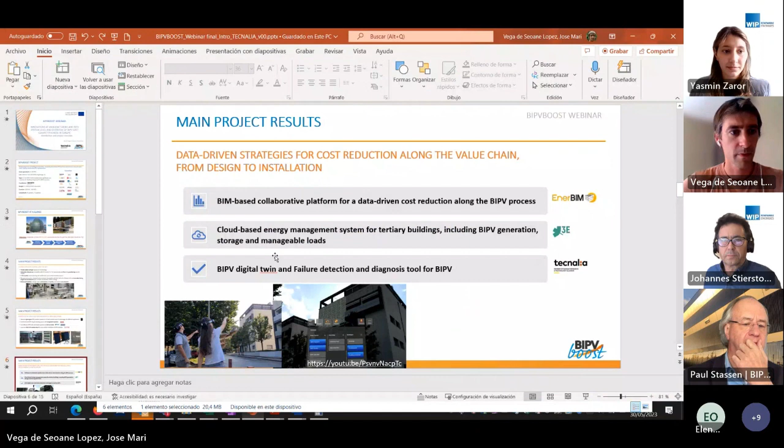As I said, this is the last webinar we are covering in the project, dealing with innovation at manufacturing BIPV system level and overall BIPV cost competitiveness in Europe.

BIPVBOOST stands for bringing down costs of multifunctional building integrated photovoltaic solutions and processes along the value chain, enabling widespread near zero energy building implementation. This was a proposal submitted under the topic demonstrating significant cost reduction for BIPV solutions in 2018.

Luckily we were successful in this competition and had the opportunity to implement all the activities that we proposed at that time. It is a consortium project led by Tecnalia, composed of 19 partners from 7 countries, covering different parts of the BIPV value chain.

In a nutshell, the project aims to move on from iconic BIPV to the mass implementation of the technology. We are aiming to progress towards the full adoption of BIPV technology in the construction sector.

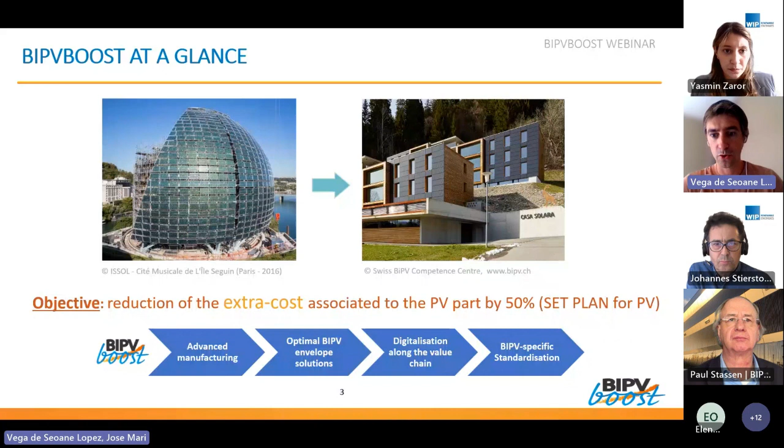Starting with advanced manufacturing, also covering the optimization of the development of certain BIPV products, implementing a digitalization strategy along the value chain, and also tackling standardization activities in the BIPV sector.

I will cover now a few of the highlights of the results we achieved in the project. This will be further detailed by Xavier Otaño from Mondragon Assembly, but very briefly, we have developed a flexible tabber-stringer based on crystalline silicon technology.

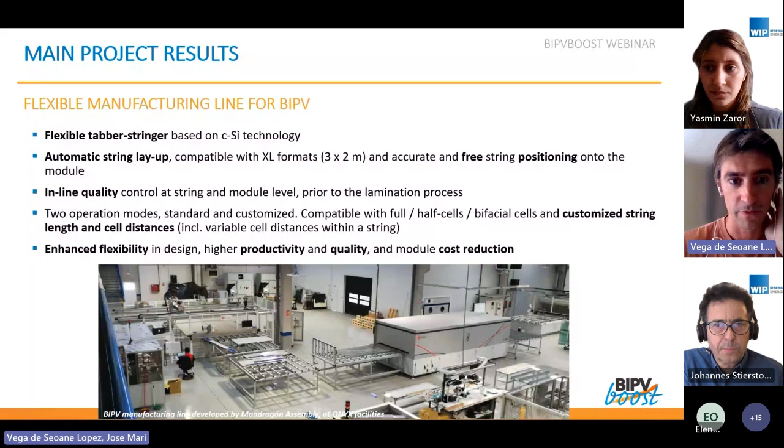We have achieved a high degree of flexibility in the positioning of the strings, also in the manufacturing of flexible strings, both in length and covering different cell distances, including variable cell distances within the same string. We have also implemented inline quality control strategies prior to lamination processes, improving the productivity and quality of overall production. This will be further detailed by Mondragon today.

Also in the frame of this webinar, we have a set of products that were developed and optimized in the project by Onyx Solar, PIZ, Flisom, Schweizer, and Tulipps. I won't enter into the details, since this will be part of today's speeches from our colleagues.

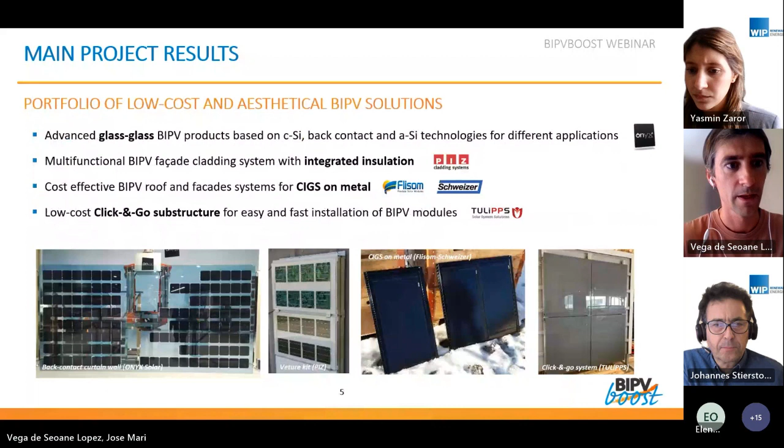On the digitalization framework, we had a previous webinar covering this topic already, which is also available online on WIP's YouTube channel, and you can go and check. We have essentially tackled the development of, or the progress in, the EnerBIM BIM Solar tool, which is a collaborative platform for data-driven cost reduction in the BIPV process.

We have also tackled a cloud-based energy management system for tertiary buildings, including BIPV generation, storage, and manageable loads from 3E. Tecnalia has led the activity in the development of the BIPV digital twin and the failure detection and diagnosis tool for BIPV.

On the standardization framework, also part of the webinar series we have created in the project, there was an intense discussion on how BIPV should be qualified and tested in the sector, and we came up with 4 different testing procedures that could provide a better approach to the current situation in the qualification of BIPV solutions.

Today we have a fragmented standardization framework, and we have proposed a new combined approach that should better allow the testing of these multifunctional solutions. We have worked on energy efficiency, energy performance in non-conventional scenarios, mechanical performance of BIPV elements, and also fire reaction.

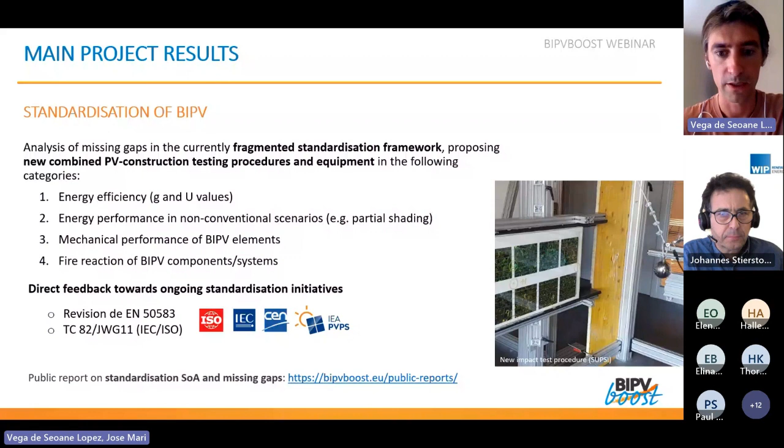Luckily, we are in direct contact with ongoing standardization activities, and some of the testing procedures that we have developed in the project are now being discussed in these forums, which is good news. And we have some available material in the public repository of the website.

And then a brief overview on the demo realization in the frame of the project. We have the first demo site in Puertollano in Spain, which hosts bifacial balustrades manufactured by Onyx Solar, and also a walkable floor using back contact technology, also manufactured by Onyx Solar.

We have then the use case of this new manufacturing line developed by Mondragon Assembly and demonstrated at Onyx, which enabled the manufacturing of these customized components, including also the combination of the glass solution from Onyx and the fast installation solution from Tulipps, the click and go system that Tulipps will explain today. This is another view of this demo site.

Then we have demo site 3 in Mons, Belgium, which includes the collaboration between Flisom and Schweizer in this CIGS on metal roofing shingle, which was demonstrated in a multifamily house in Mons. And at last, we have the realization from PIZ, also in collaboration with Onyx Solar, with a Veture kit developed in the frame of the project, which was demonstrated in a residential building in Italy.

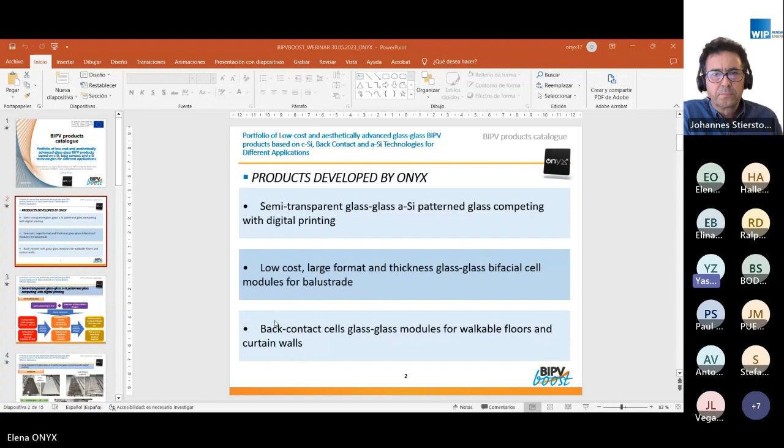Elena, sorry, can you make it full screen? Full screen? No, at least I cannot see it full screen. Now? No, it's not on presentation mode. Maybe you shared the wrong screen. Just a second. And now? No. If not, I will try to share mine because I have your presentation. You can try to push F5. I don't know what's the problem. Elena, if you want, I can present. Don't worry. So here is in presentation mode. You can see my screen, right? Yes. Perfect.

Okay, so I will start again. Here I'm going to present the different products that we have developed within the project. We have based our work on the development of 3 different approaches. The first product was based on semi-transparent amorphous silicon pattern glass, competing with digital printing. The second product was based on low-cost, large format and thickness glass using bifacial cells for balustrade applications. And the third product was based on back contact solar cell glass modules for 2 different architectural applications: one for walkable floors and the second one for curtain walls.

So next slide, please. Let's start with the first product, the semi-transparent amorphous silicon pattern glass, competing with digital printing. To develop this first product, we follow the methodology that you can see on the screen. We use the laser used in the manufacturing of BIPV modules based on amorphous silicon. This laser is used to give the different transparency degrees to the PV modules.

With this also we performed 4 different pattern designs based on this technology, and we followed a step-by-step process. The first step was to develop small prototypes of these 4 selected patterns, and these 4 prototypes were tested by visual inspection. We also measured the electrical response, and the samples were subjected to damp heat testing. The prototypes that successfully passed the test were then validated, and they passed to the next step

of the development. The second step was to manufacture full-size prototypes with dimensions of 1,245 millimeters by 635 millimeters, and these prototypes were also tested by visual inspection and the measurements of the electrical response. And once they successfully passed the test, they were validated and passed to the next step of the methodology. This last step consisted of the development of XL size prototypes with dimensions of 2,000 millimeters by 635 millimeters, and we followed the same methodology. The prototypes were also tested, and the good ones were validated as a final product.

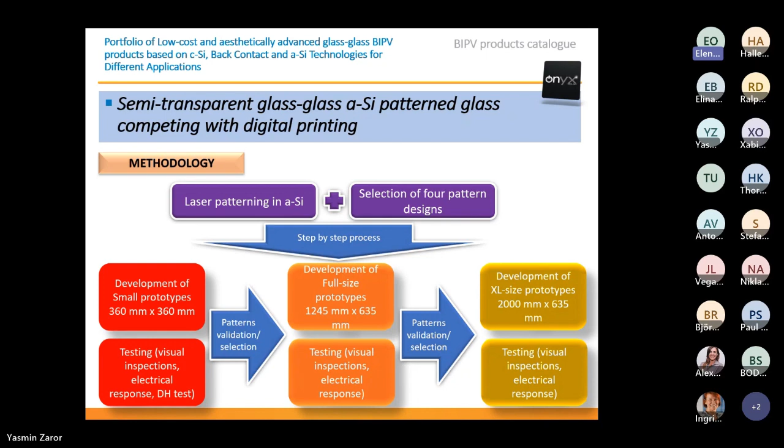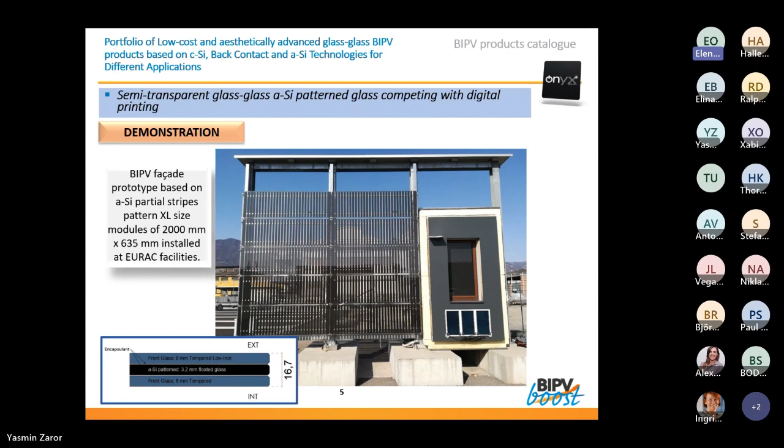Then one of the patterns, in this case the amorphous silicon partial stripe pattern, was selected to be demonstrated. So in this case, we manufactured 10 XL size modules that were installed as a BIPV facade solution at EURAC facilities, and this demonstrator is being monitored nowadays.

So next slide, please. So let's see now the second product that we have developed within the project. In this case, it was based on bifacial cell modules, and the idea is to develop a product for integration in balustrade applications. So the methodology that we followed was based first on the selection of the bifacial PV cells, and then the idea was to manufacture different glass BIPV modules by following a progressive increase in the dimensions and in the thickness of the different samples. The process followed was also step-by-step, and the methodology was very similar to the one that we followed for the first product.

First, we developed small prototypes, in this case with 2 different thicknesses, and the samples were tested by visual inspection. We measured the electrical response, and the samples were subjected to damp heat test. Once the prototypes passed all the tests, the prototypes were validated, and also the process was optimized, and we passed to the second step. The second step was the manufacturing of full-size prototypes, in this case with a glass configuration of 8+8 millimeters. These prototypes were also tested, and once the results were successful, the prototypes were validated and passed to the last step of the development.

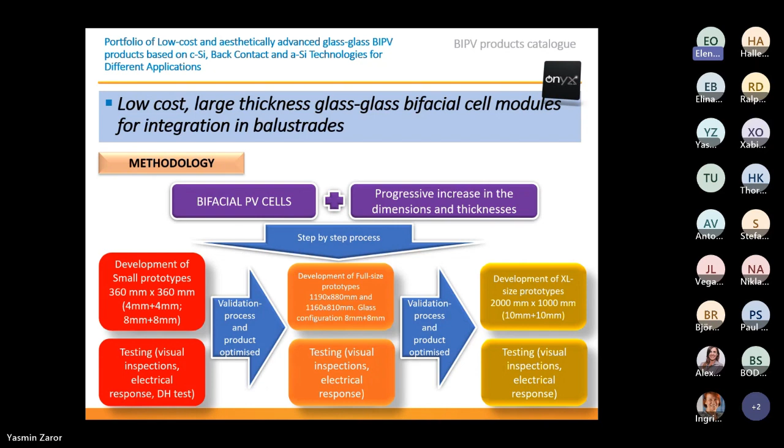This last step was based on developing XL size prototypes of 2×1 meters and with a thickness of 10+10 millimeters. These last prototypes were also tested, and once the results of the test were good, the prototypes were validated. So next slide, please. So here on the screen you can see the different prototypes with the different sizes that we manufactured during the process of obtaining the final XL prototype. Next one.

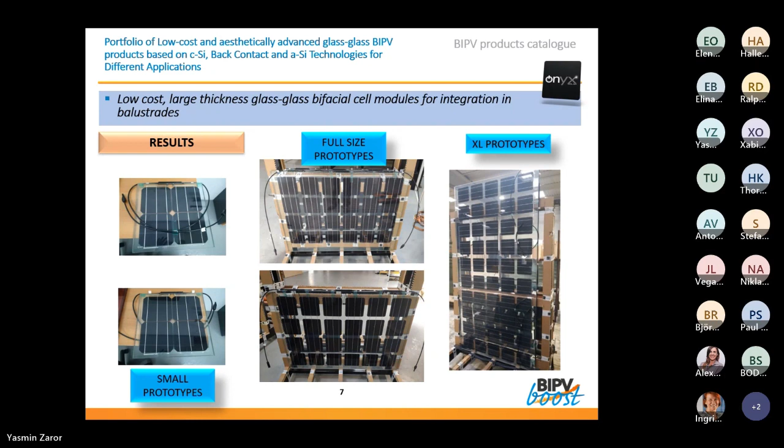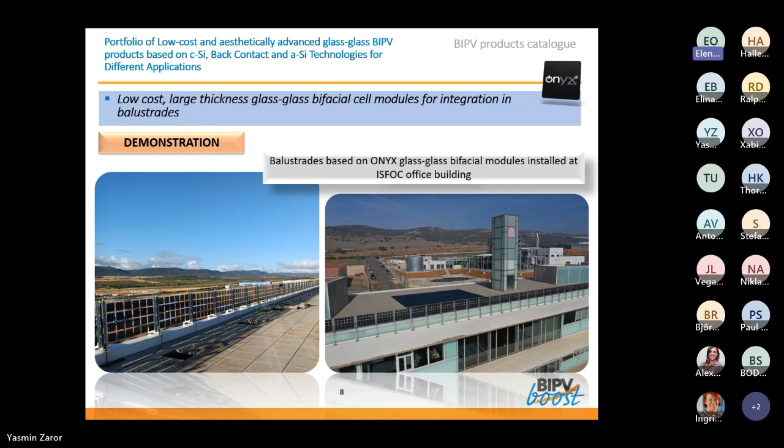So in this case, with this product, we chose the full-size prototypes to be demonstrated. The prototypes were manufactured and integrated as a balustrade application at an office building located in Puertollano in Spain. So next slide. Here you can see another picture of the balustrade and the implementation. The surface that was installed was around 126 square meters with an installed power of the final solution of around 13 kilowatts.

Next. So now here I'm going to show you the work performed for the third product. This third product was based on the use of back contact solar cells, and we developed BIPV glass modules for two different architectural applications, one for walkable floors and the second for curtain walls. The methodology used was based first on the selection of the back contact solar cells, and then we built two different workflows depending on the final architectural application.

In the case of the walkable floors application, the first step of the methodology that we used was to develop prototypes with dimensions of 600 by 600 millimeters and with a glass configuration of 8 plus 8 millimeters. These prototypes were tested by visual inspection. We performed the measurements of the electrical response. The samples were also subjected to damp heat test and also electroluminescence. Once the tests were successfully passed, the prototypes for walkable floors were validated.

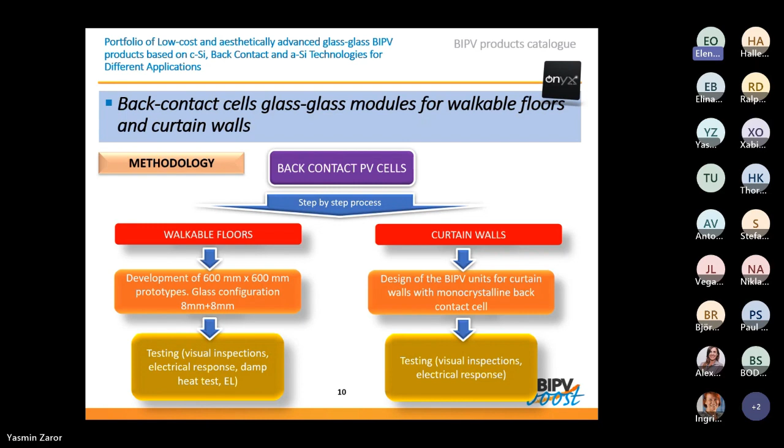In the case of the application of curtain walls, for the first step of the development of this product, we made several designs of BIPV units using monocrystalline back contact solar cells. Among the different designs, one of them was selected to be manufactured and tested. So finally, once the prototype was manufactured, it was subjected to different tests and then validated. Next slide, please.

So in the case of the prototypes of the products developed for curtain walls, as I said before, we made different designs, and the design that is shown on the right side was selected. In this case, we selected this design because we thought that it was the best example to study or compare the behavior of two different PV cell layouts in the same module. Next.

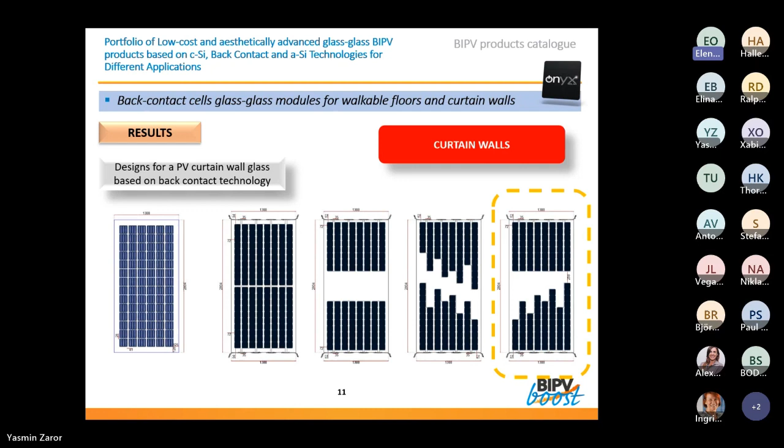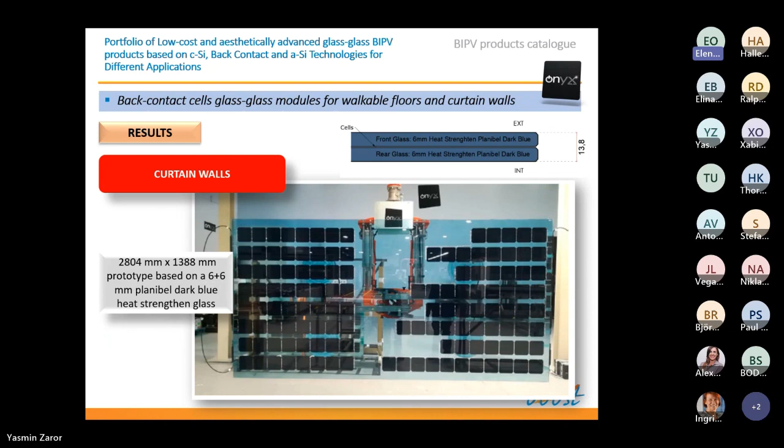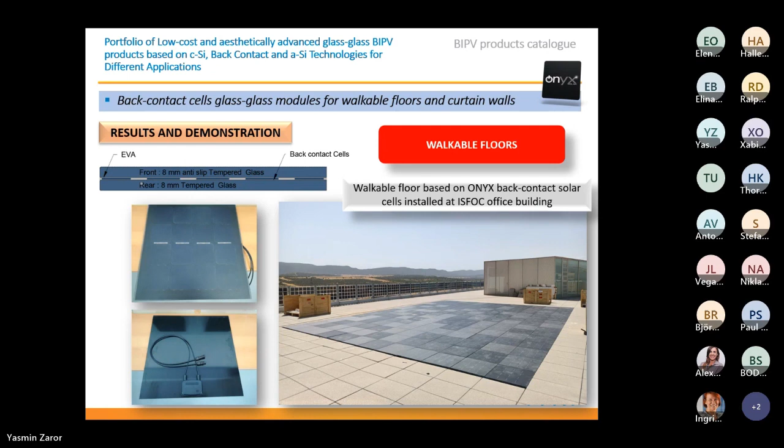And finally, the prototypes developed for the walkable floors application. On the left side, you can see the final prototype, the final module. In this case, this prototype has a front glass with an anti-slip treatment. And this product was also chosen for being implemented as a demonstrator. In this case, the walkable floor was installed also at the ISFOC office building in Puertollano in Spain. Next.

The surface of installation was around 69 square meters, with an installed power of 9 kilowatts. And that's all from my side.

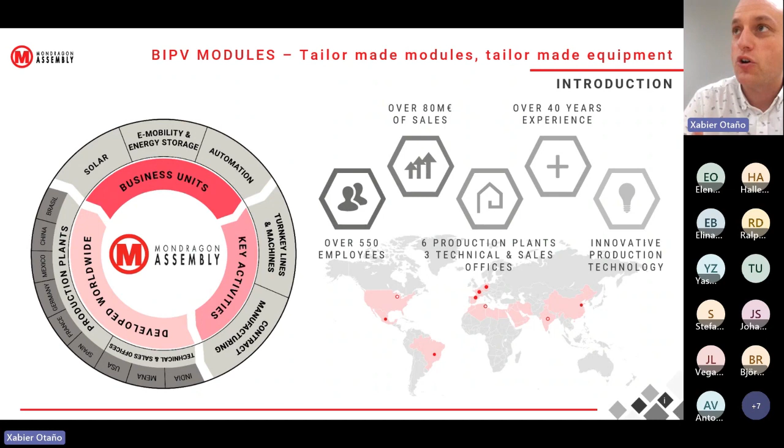Okay, so Mondragon Assembly, we are a company that builds equipment, with worldwide presence, and over 20 years doing solar manufacturing equipment. I'd like to focus in this presentation on the fact that there is a lot of PV industry in mainstream modules, but there are a lot of applications beyond mainstream modules, and specifically today, BIPV modules.

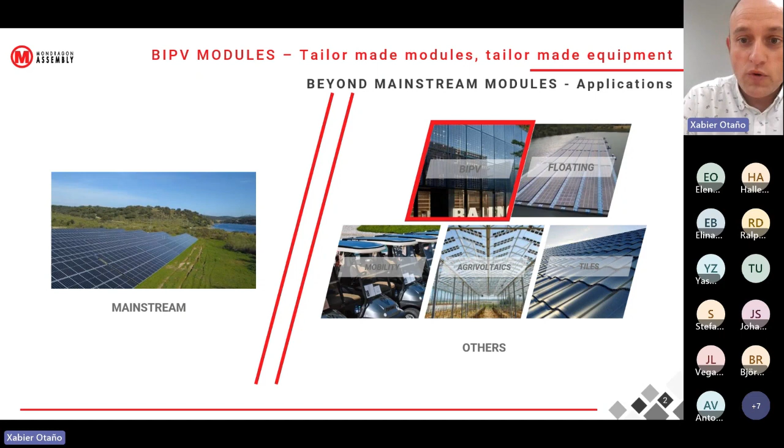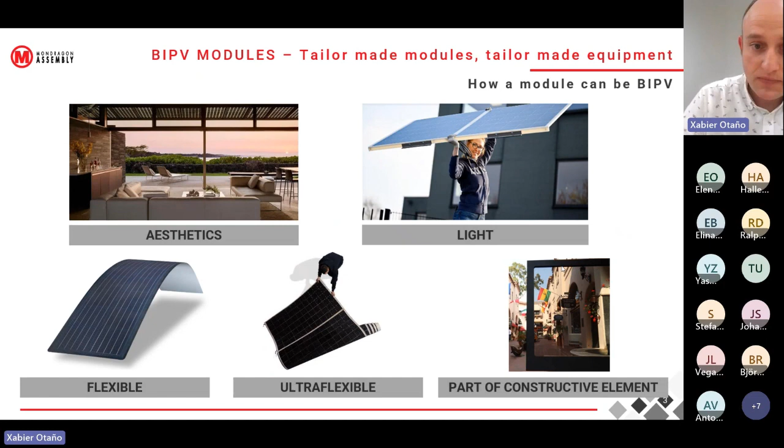So when we talk about BIPV, there are different ways that something can become BIPV. Some of our customers focus the BIPV aspect of their modules on aesthetics, as Onyx was explaining better than myself. Some others focus on how light the module is, and because it's light, it can do some specific things, being flexible, ultra flexible, or being part of a constructive element. That's also a little bit what Onyx is doing with making the glass photovoltaic, or some others are making windows that are photovoltaic, as you can see in this picture. So okay, that's for the modules.

What do we do in Mondragon Assembly so that our customers are able to manufacture these kinds of different, specific modules? When our customers are looking for aesthetics, we have developed our tabber stringer BIPV option inside the BIPVBoost project that allows us to have different gap distances between cells and different string configurations. So having a very flexible tabber stringer that allows a very aesthetic look of the manufactured module.

We have also developed a flexible tabber stringer. This is the MTS Flex, which is able to process back contact cells, Maxeon or Zebra, front and rear wired cells, welded, ECA, so very flexible for any kind of technology when searching for the look of a panel that has no wires.

And also, for very big and very small panels, when customers are looking for a very wide variety of sizes, we have developed a layup system, the system that puts the strings on the glass, for glasses from 0.3 by 0.3, extra small modules, to very large modules, 4 meters by 2 meters. That would be when we look for aesthetics.

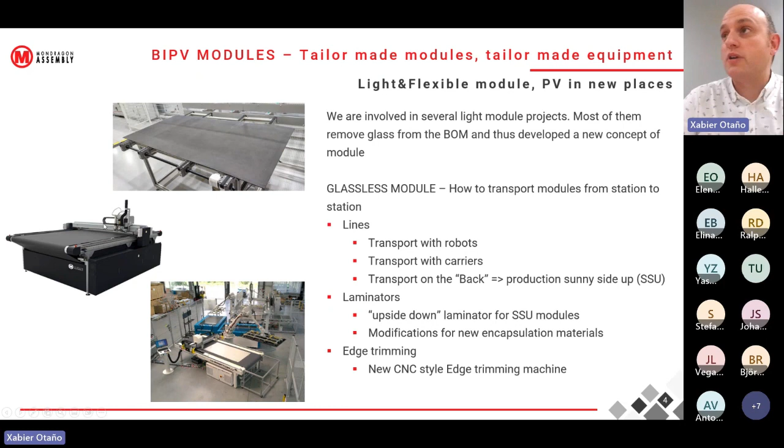And then another tricky thing when doing glassless modules is the edge trimming operation. For the edge trimming, normally in classic modules with glass, the knife goes against the glass, and the glass itself is used as the reference point to do all the trimming. When there is no glass, we need to use this kind of CNC style cutting trimming machines, and this allows us to do shapes that are not only square ones, but with rounded corners or other more fancy corners.

And apart from not having glass, we see that on BIPV, the applications are more and more integrated on the building, which means that the glass of a window or the wall or the facade itself will be a PV application. When it's part of the building, the challenge is where to have the cables, the junction box, or how to bolt or install them to the walls or the building, because it's not standardized and every product is customized. So we have developed specific machines for different applications for different customers.

So for example, when people are doing things without junction box, where to install the diodes. So we have done an auto bussing machine that includes the diode loading, or a specific, totally standalone station just for the diode soldering.

In classic, mainstream modules, the J-box is glued with silicone to the backsheet or the glass. But when we are not using glass, and instead of backsheet we are using other materials, the J-box with silicone needs special treatment on the material to be able to bond together. So we have developed machines, plasma machines, flame treatment machines, etc., to be able to do this bonding.

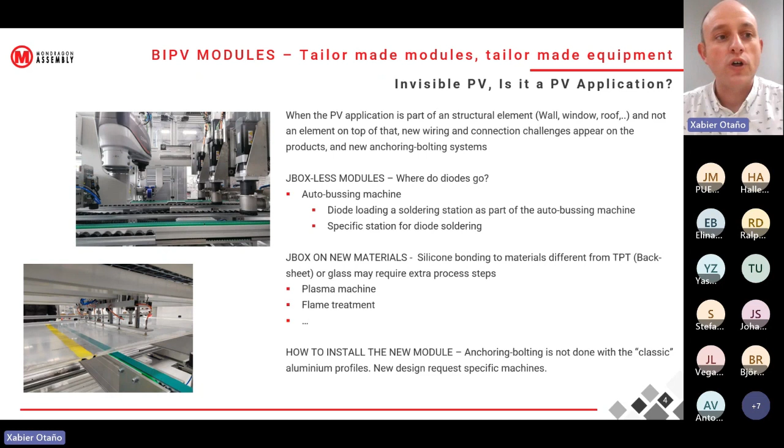And then, as mentioned, the installation of these new configurations on the buildings may require some special bolting systems that are not the classic aluminum profiles. So there are specific equipment and process steps that need to be developed for these applications, adding some studs, some plastic nuts, some other elements to do the joining. And we have also developed this kind of machines. And this is what we are doing in Mondragon Assembly in BIPV related applications.

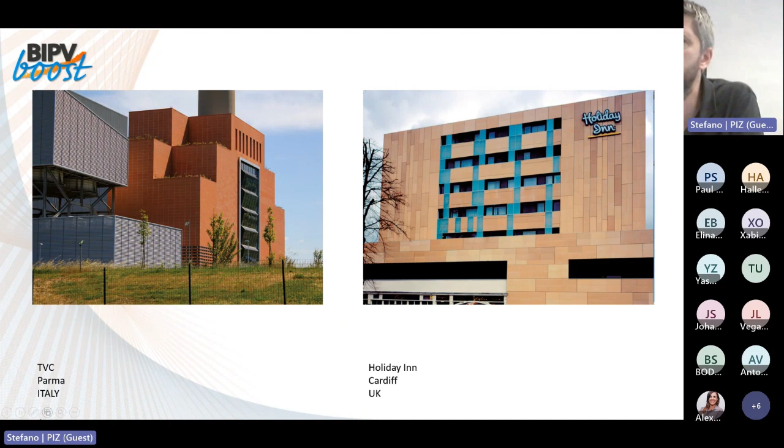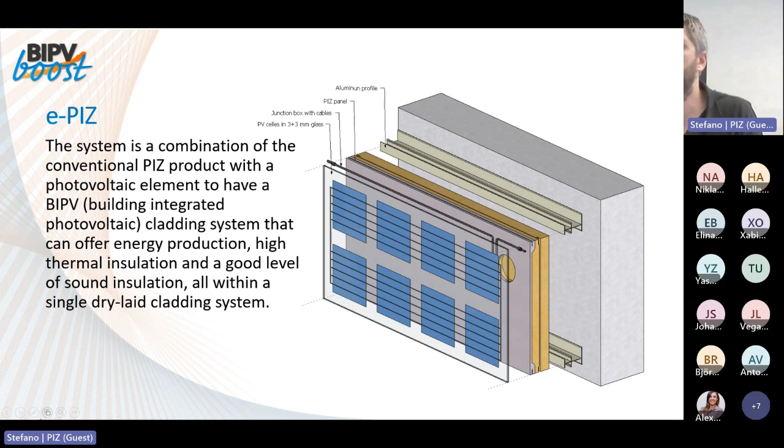We can see here a few different buildings made with the PIZ panel, all different kinds of building, hotel or housing. From this PIZ cladding, we implemented this system with PV. The system is a combination of the conventional PIZ product with photovoltaic to have a BIPV system. In this way, we have thermal insulation, a good level of sound insulation, with also production of energy.

Thanks to BIPVBoost, we developed two types of product. The first one was the PIZ panel glued with the PV cells, just 3 + 3 millimeter of glass provided by Onyx, and another option with lightweight PV CIGS technology. We did a few preliminary tests, and at the end, we continued with a single product, the 3 + 3 millimeter of glass, with which we also did the demo site.

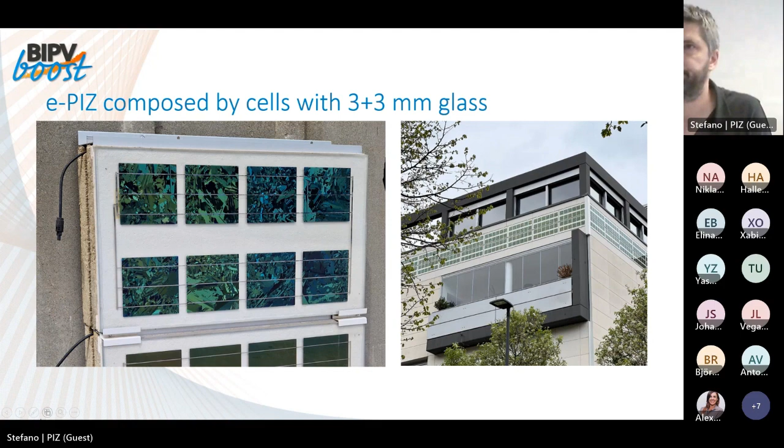As I said, the products were tested. Also, we achieved the product at TRL 7. And we did suction test, shocking test, fire reaction test. And also now we are going on and we try to achieve TRL 8 validation to achieve the CE certificate and sell the product.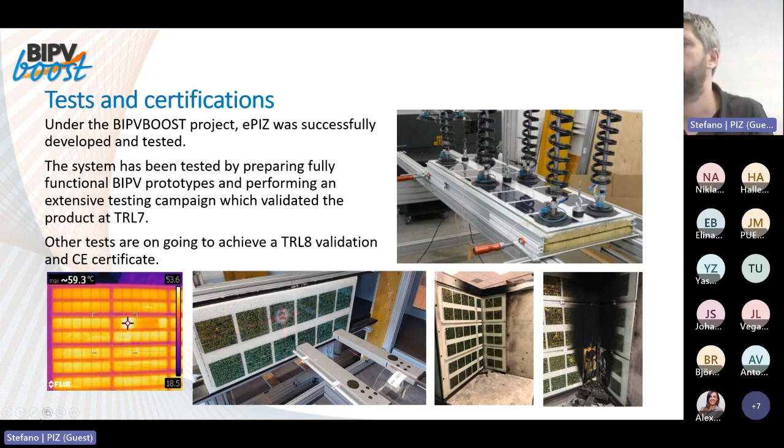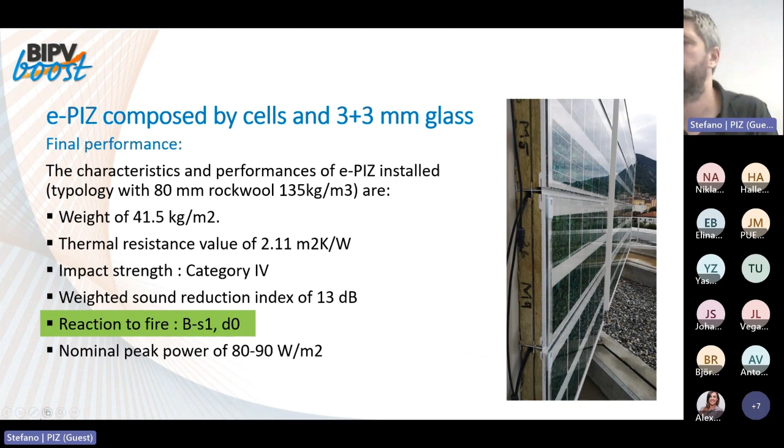With this product, with the ePIZ, with 80 millimeter of rock wool, we had a system of around 41 kilogram per square meter, thermal value of 2.11 square meter Kelvin per watt. But the really good characteristic is the class reaction to fire, because we achieved the class B S1 D0. That is a really high value for a facade with the PV integrated.

A few slides of the demo site in Morbegno in Italy, where we installed 9 kilowatt on the facade of two twin housing buildings. And these two buildings were realized already with the PIZ cladding. Then we removed the last rows on the top of the building, and we replaced them with the new ones with the PIZ system, with the PV.

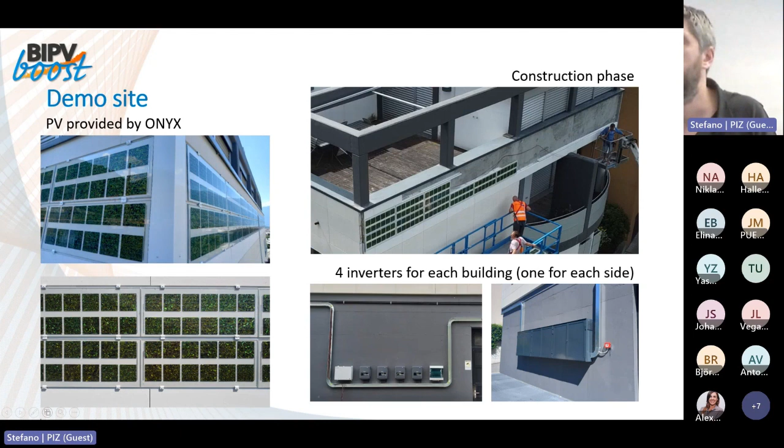Few details during construction phase. Some zoom of these cells provided by Onyx. Like I said, these cells can have a different effect. In this case, there is this green golden effect. And on the bottom also the inverter. The ePIZ was installed on 4 sides of the building, so 4 orientations, north, south, east, and west. And for each building, we installed 1 inverter for each side.

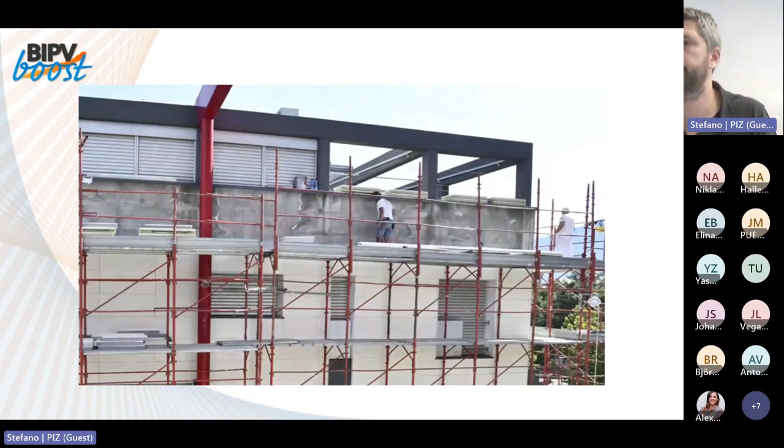Here, a short video where it's possible to see the installation. As I said, it is a dry system, so it's really easy and quick to install the panels. Sorry.

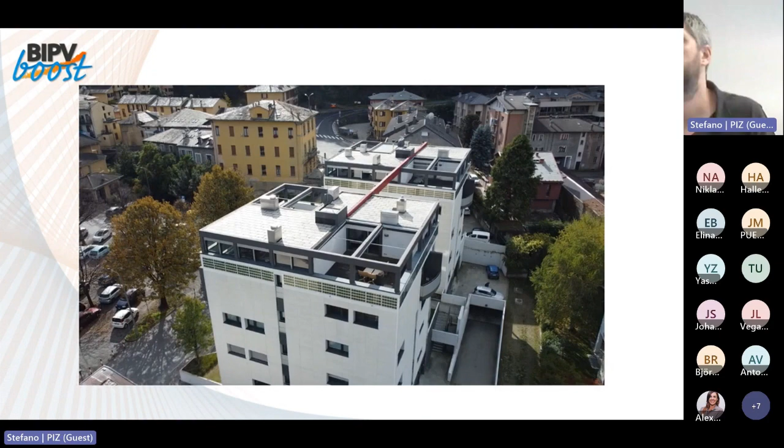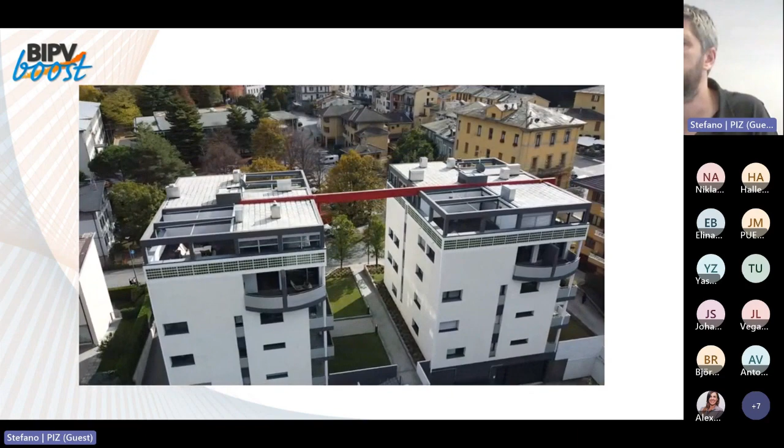And this is the final result, where we see the ePIZ on the top of the building, and what we think and what we believe is that in this way we gave value to the building, not only from a technical point of view or profit, but also from an aesthetic point of view. And this was integrating the PV cells in our cladding system.

That's all. Thank you. I would like to give the floor now to Andreas Haller from Schweizer. Thank you very much, Elena. Jasmine, I hope you can see my screen. Yes, we can. Thank you. So,

My name is Andreas Haller, from the company Schweizer AG in Switzerland. And we have since quite some time a roof integration system, the system Solrif, and we have used this system first as a vehicle for the design and for the production of the demo site CIGS modules, and also to improve the system itself. So I give a few words on the system itself in the beginning, and then some words on the achievements in the BIPVBOOST project.

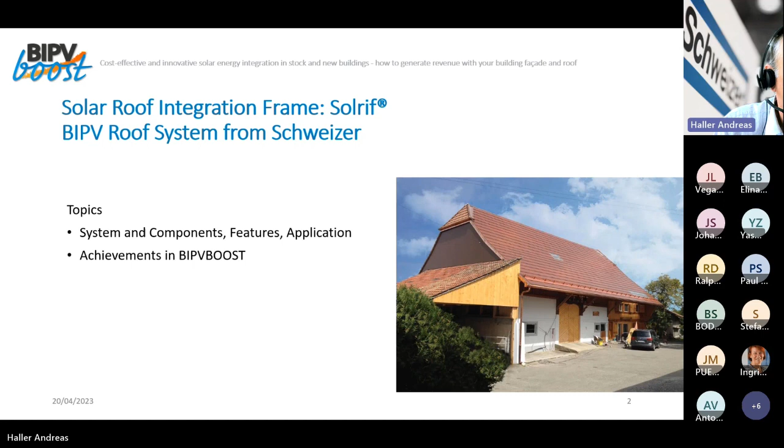The Solrif BIPV roof system consists of a few simple components. You have the roof substructure, then you have the modules, which in the beginning had to be the same size, the same type, of course. Then you fix them with the clamps on the roof substructure. You have standard flashings for tile roofs around. And before the BIPVBOOST project, part roofs were limited to rectangular shapes. With customized flashings, you had no limits. You could cover a complete and complex roof.

So features and advantages. The Solrif roof tiles replace the conventional cladding of the roof, and this saves, for new construction and for roof renovations, a lot of material and a lot of CO2. It's easily installed with standard flashing systems, especially for part roofs. It has better stability than rooftop installations, and can resist much higher snow loads. It's suitable for almost all the typical sizes of the standard modules.

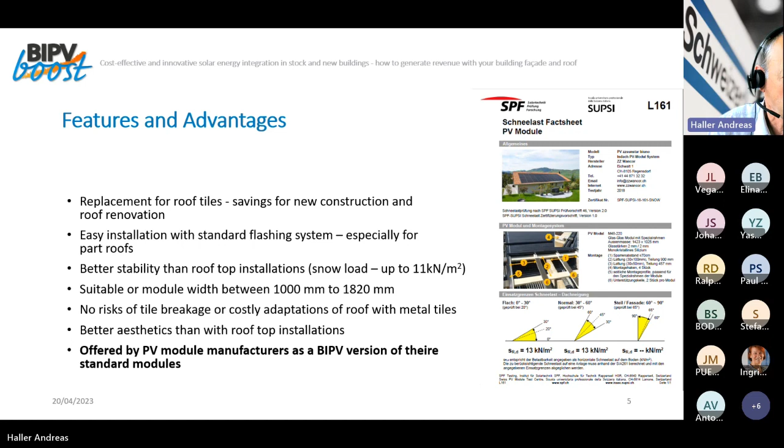Of course, the risk of tile breaking is not here anymore. It has better aesthetics. And what is important, we do not sell these modules as Schweizer. These modules are offered by PV module manufacturers as BIPV versions of their standard modules. For installation and operation, there are quite some features available. There are colored modules on the market. You can add snow guards. You have holders for lightning protection, and for service, you can detach every module individually in the field.

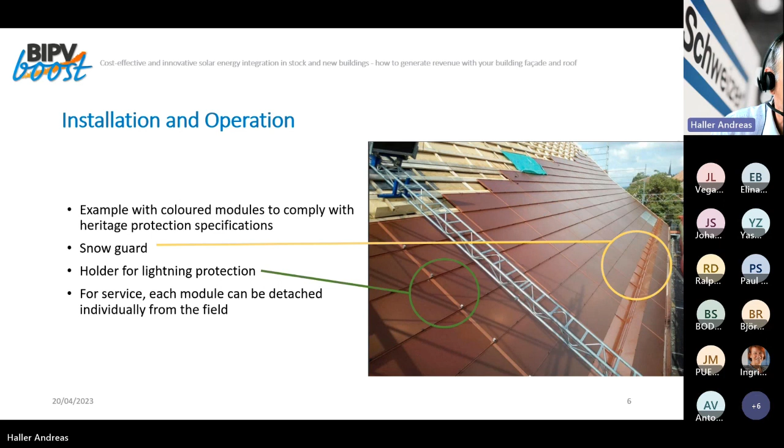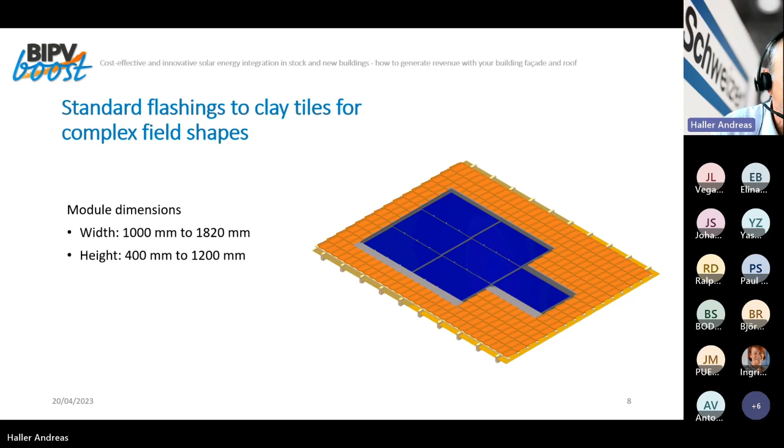Now, the achievements within the BIPVBOOST project. We have extended the flashing also for complex field shapes. You can see you have these inner corners, and the top side, the bottom side, and of course left and right can now be managed with standard flashings. This allows for these part roof implementations or also for full roof implementations.

Also in the planning tools, we have implemented the module family function. Up to 3 modules with the same height and different widths can be specified as a module family and used in the same roof for the design. This enables a significantly better utilization of the roof area with active modules.

To enable even inexperienced installers to successfully install full roof efficiently, we have created a library of standard flashing details. These solution examples are freely available as CAD data from the Solrif website. You just go to the sketch of the house, click on the detail you want to see, and then download it.

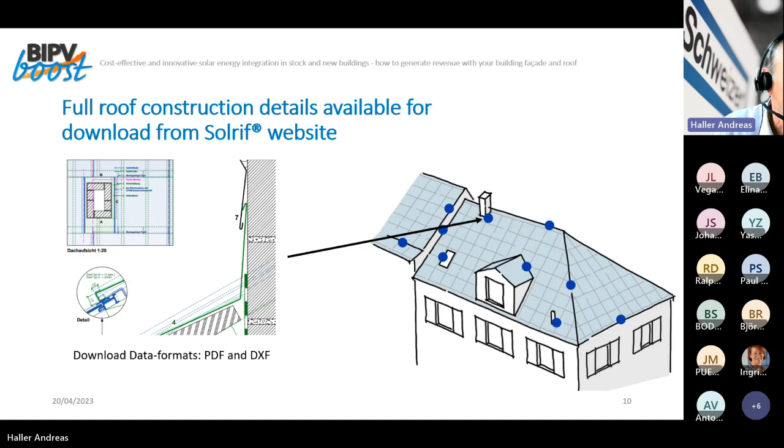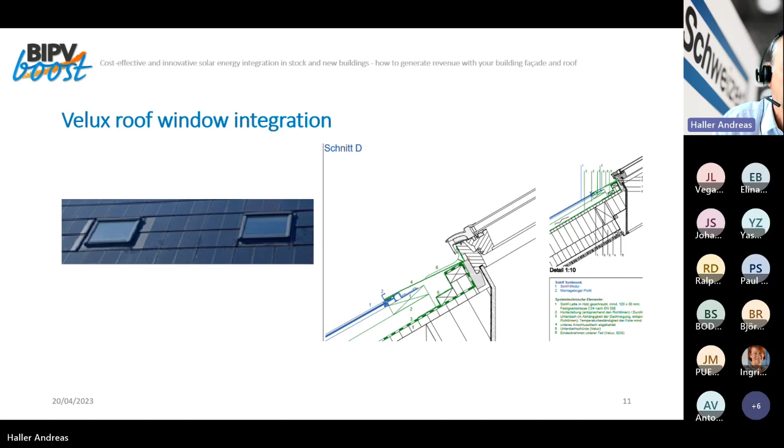One of the most complex details is with existing Velux roof windows. They are really complex, and for these solutions we have appropriate example situations as well.

For the installers, a significant reduction in installation time was achieved with the development of an installation gauge, as the clamps can now be positioned and fastened by only one installer instead of two. This was important feedback from installers that it was time consuming and should be sped up, so we were able to do this within the BIPVBOOST project.

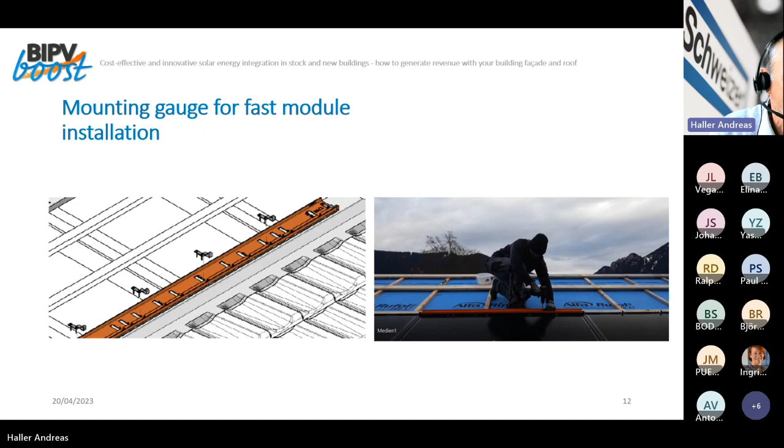And last but not least, in demo site 3, all these complex design details were implemented for this full BIPV roof.

Part of the material for this roof could be prefabricated and delivered with the CIGS in-roof modules that have also been developed and produced for this project, and other parts were supplied by third-party manufacturers and partly adapted on-site.

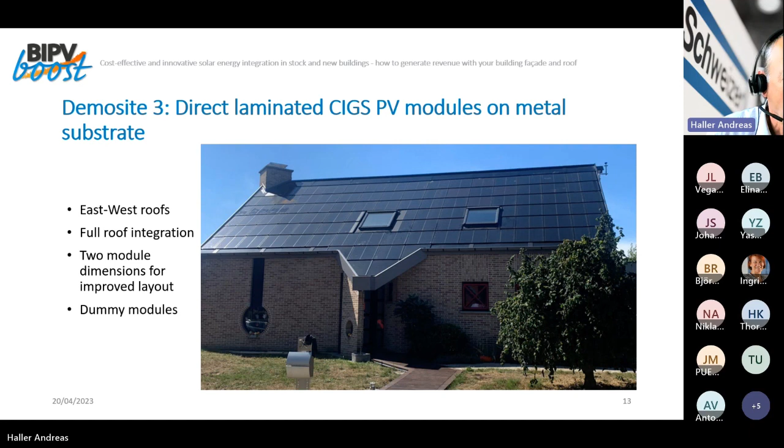We have an east roof and a west roof, full integration, two different modules, and almost all complex situations you can imagine can be found in this project.

For further information, please refer to the Solrif website. We also have a web application for the planning tool, ProSolrif, and in BIPVBOOST the product catalog will be available quite soon. Thank you very much.

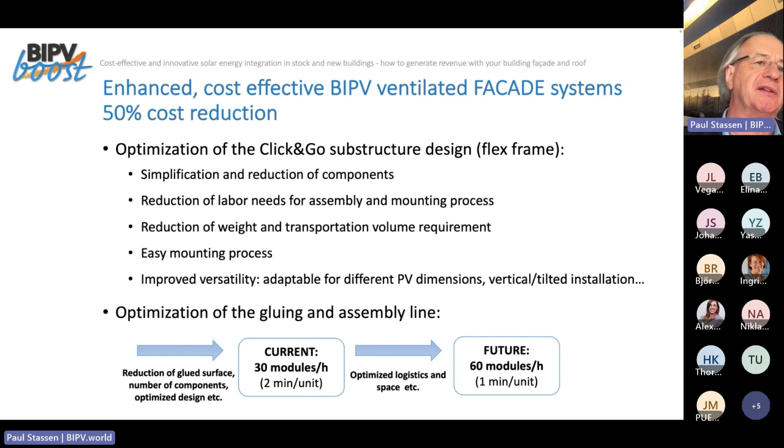At the start of the project, installing one module needed quite some time, but we sped it up to 2 minutes per module. So the current production is 30 modules per hour, and we could further improve it in the near future to 60 modules per hour, so it could easily be combined with the Mondragon production line.

In addition to optimizing easy installation and versatility, we also built some samples and small demos to test the functionality. You can see both the vertical installation on the right side and the tilted installation on the left side, combined with traditional facade materials, in this case aluminum composite cassettes.

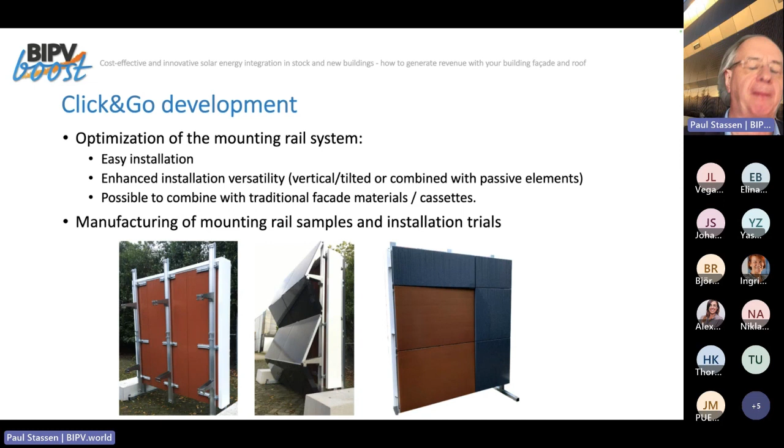The feature of the system today is that the click-and-go mounting for ventilated facades can accommodate almost any solar module size, up to 2.80 meters long and more than 1 meter wide. It's very easy to design and engineer, and we'll come back to that later. It's ultra fast and safe installation.

Depending on the situation, installation takes 0.6 to 0.8 hours per square meter, and that has already been demonstrated in practice. Very important for insurance companies today is that each solar panel is individually exchangeable.

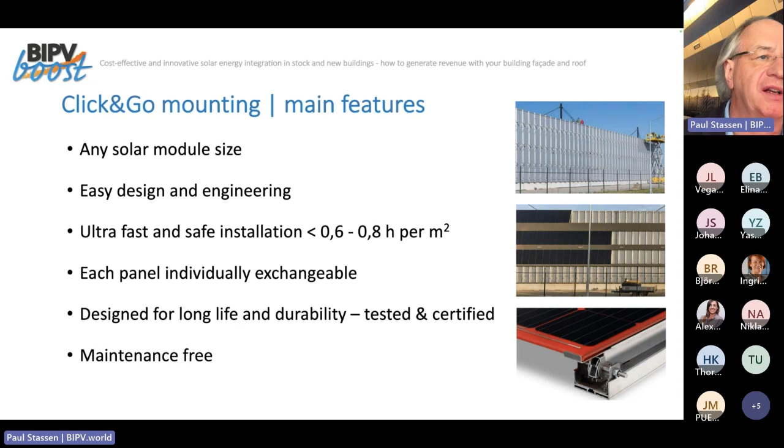The click and go is really click and go. You install it without screws, so it's sliding and clicking, and it's made secure by a rotating element. By taking out the rotating element, you can easily remove the module again if needed, for instance for inspection. The whole system is designed for long life and durability, fully tested and certified, and maintenance free. So the USPs are easy, fast, safe, and beautiful.

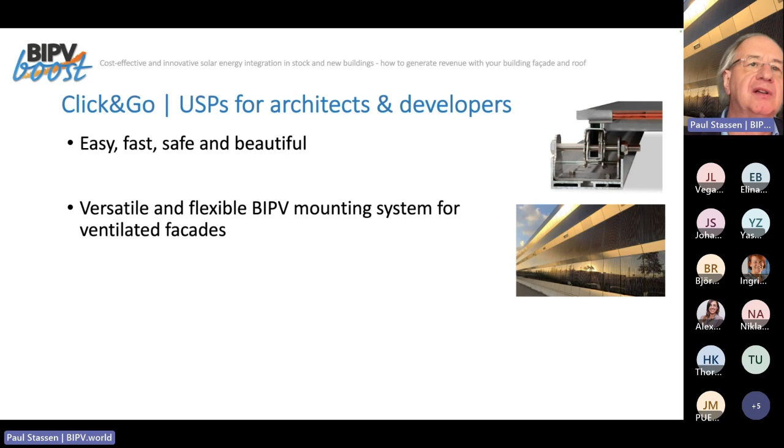It's very versatile and flexible for ventilated facades, and because we operate an automated gluing and assembly process, it's controlled, secure, and fully prefab produced.

With the standard produced solar modules, glass, we offer 200 to 205 watt peak per square meter, which means 140 to 150 kilowatt hours per square meter, depending on the situation.

In the project, we also demonstrated the system at the Mondragon site in cooperation with Onyx, and it is a beautiful result.

The cost of the system, when we talk about mass-produced, ready-to-install systems, so click and go, plus the frameless module, black, 60 cells, including inverters and cables, is between 375 and 400 euros per square meter.

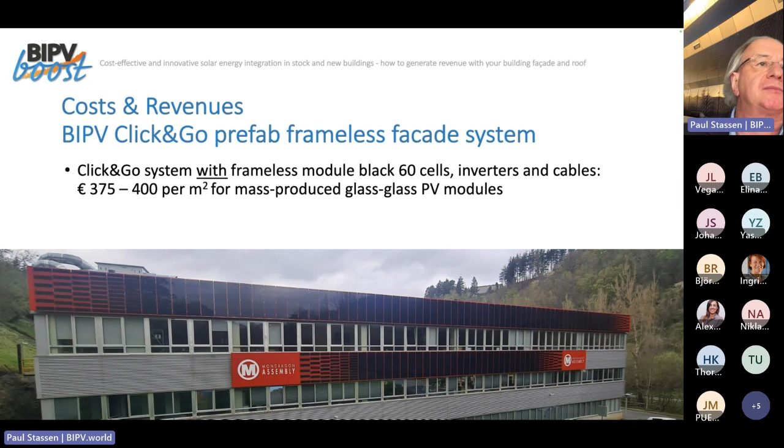Then we talk about mass-produced glass-glass modules. And when you were planning to build a ventilated cladding facade anyway, and then you think about the extra costs for the photovoltaic functionality, then it's only 175 to 200 euros per square meter.

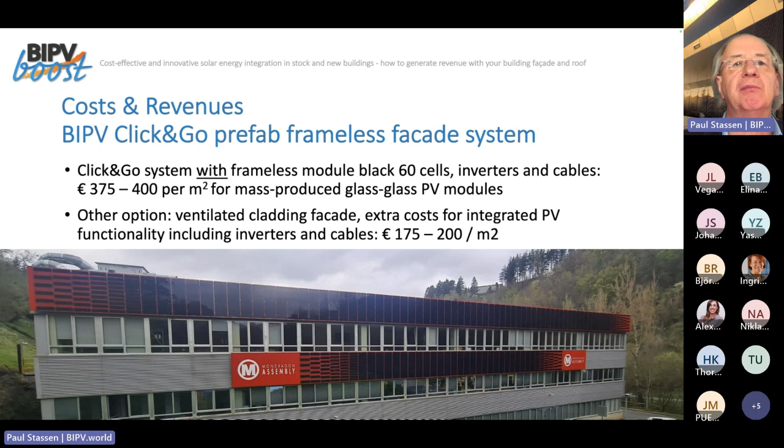During the BIPVBOOST project, we proved that we could reduce the cost of the click and go mounting system by 50%, so we achieved the goal.

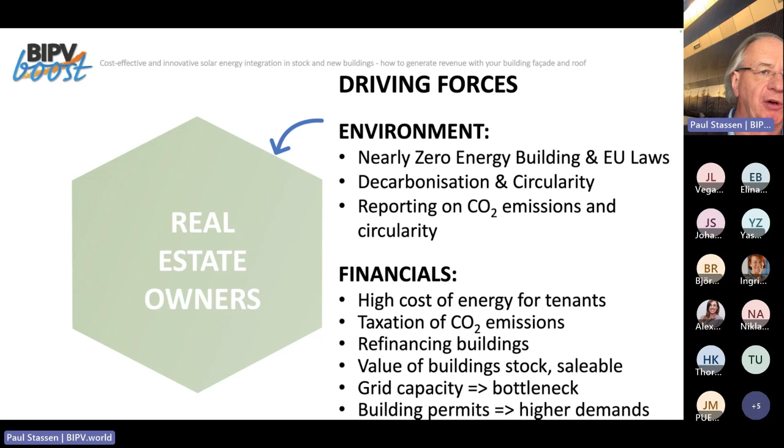We do this for the real estate owners who have a lot of demands to fulfill due to new European legislations, but also for other reasons, like the upcoming taxation for CO2 emissions.

And the issue is how to achieve these new requirements, especially in the building industry of high fragmentation and high diversity. How do you deal with that?

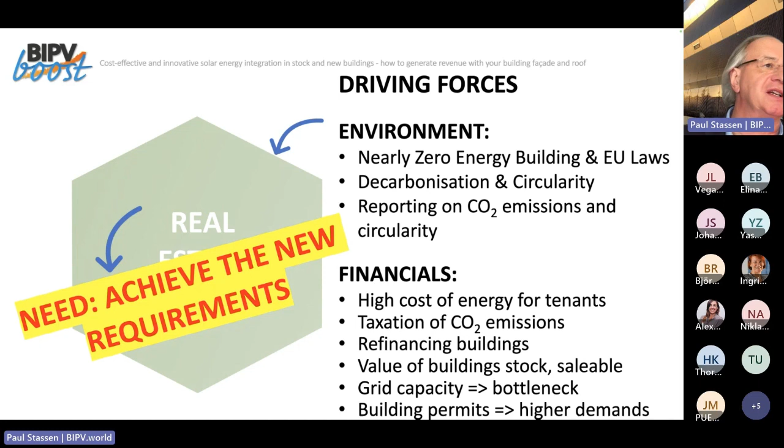So one of the questions we are facing as an industry is how are we going to make the implementation process very efficient? Because what we see is that in the whole process of implementation, you have, as a system supplier, you have to talk with a lot of stakeholders in the industry.

So you want to talk to the real estate owners, but in the meantime, you have to talk to facade builders, architects, construction partners, and you're also competing with competing component suppliers.

So we came up with the BIPV World platform for automated and better BIPV designs and lower cost, because we want to slash the implementation cost for BIPV. It's a platform for easy design and efficient implementation of aesthetic and cost-effective BIPV systems.

I hope that the video will work.

Because of climate change, fossil energy challenges, and historically high energy prices, renewable energy solutions are crucial. Laws and regulations are in place, but most people lack the knowledge and experience to tackle the energy transition.

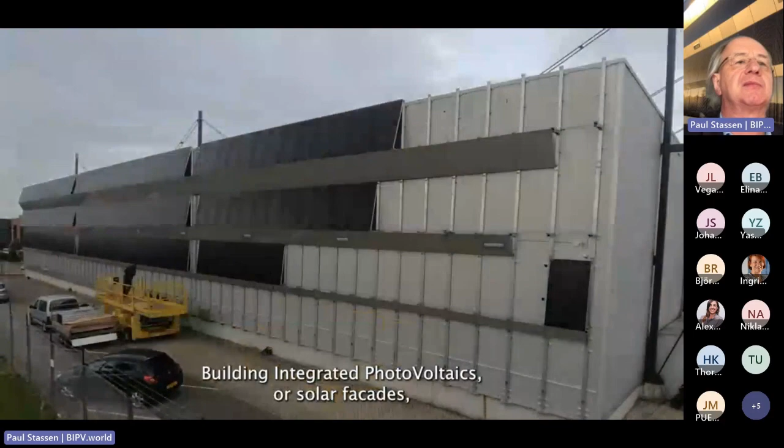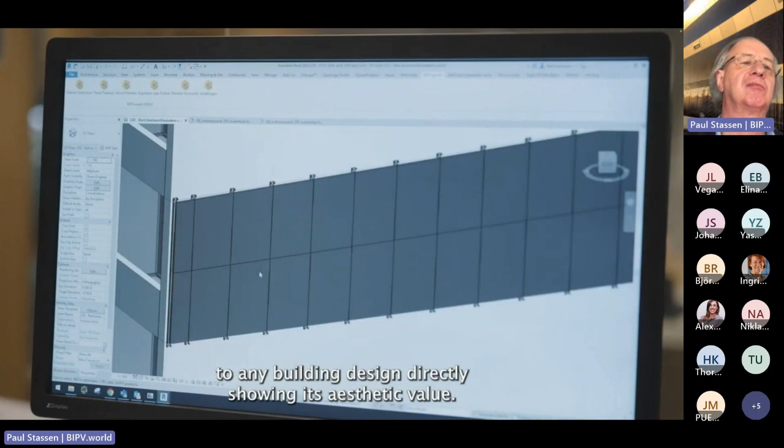Building integrated photovoltaics or solar facades can address these challenges, especially when structured and automated through a fully digitalized supply chain. Introducing BIPV World, a SaaS platform enabling professionals to easily add solar power to any building design, directly showing its aesthetic value. And with both costs and revenues fully transparent before construction starts, financial risks are minimized.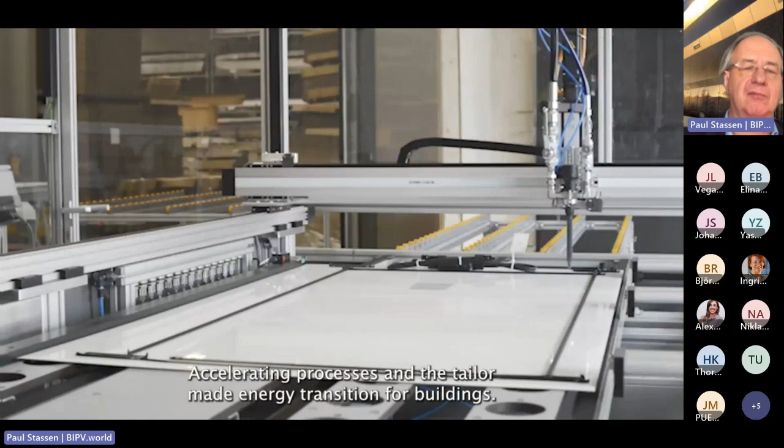Digitalization also concentrates and shares the scattered knowledge and industry-wide expertise, accelerating processes and the tailor-made energy transition for buildings, while grid capacity problems are solved using several techniques.

Because of the centralized platform, suppliers of BIPV products and services can greatly benefit too. BIPV World minimizes implementation costs and complexities and also eliminates industry-wide scalability issues.

BIPV World enables the easy design and implementation of aesthetic, cost-effective BIPV systems by connecting providers and customers with ready-to-install prefab systems, turning potential complications and additional costs into attractive, safe opportunities and a wise financial choice.

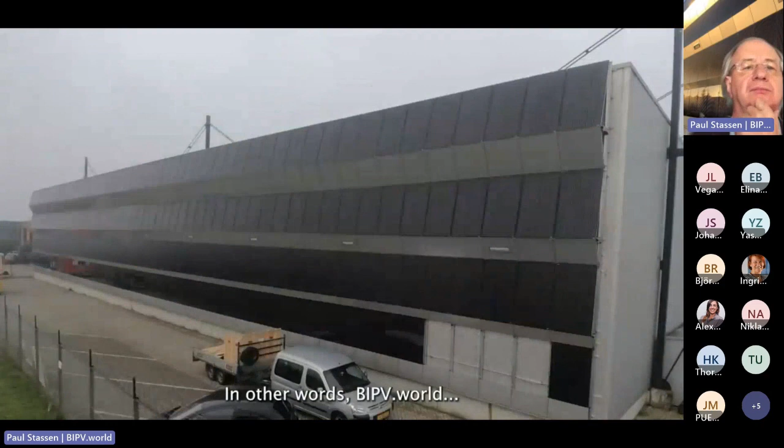In other words, BIPV World is a crucial platform for realizing ambitions, complying with legislation, having aesthetic power generation, and earning money with the facade.

I'm going to skip this sheet.

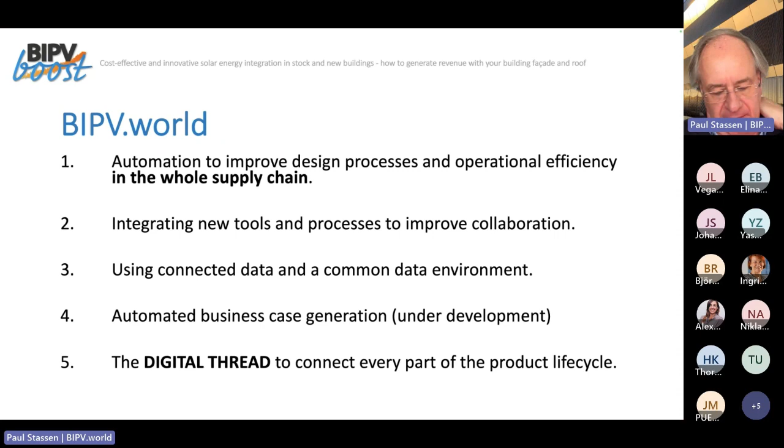The platform is basically a location where you can find all the systems and all the solar modules that are available, and then you can download the Autodesk Revit plugin.

The architect can easily make a design, and then immediately the data from the drawing is communicated to the platform. Not the drawing, but the elements that the architect has designed.

And then the architect or the developer immediately gets a cost indication for the complete system. And it's all made possible by a digital backbone in the BIPV World platform.

We invite other suppliers of systems to join the platform and make their systems available in this tool, because this is, in our vision, the only possibility to scale BIPV solutions across Europe in a very efficient, cost-efficient way.

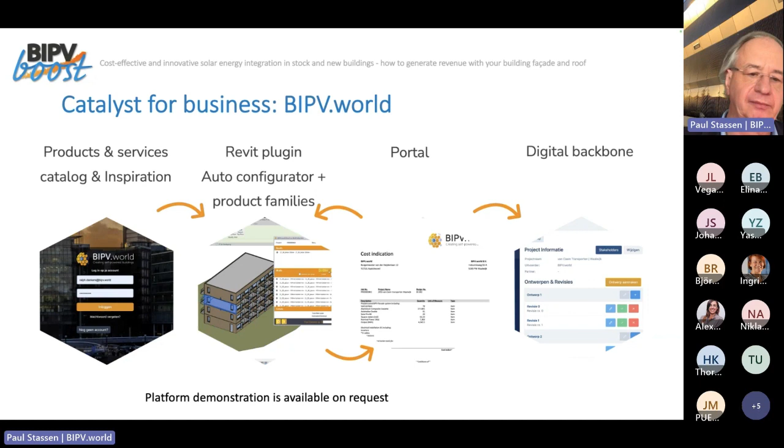So what's happening is that BIPV World is helping the architects to make the right choices, helping facade builders also to make the right choices, to have the right design that we know can be made, and that you have a very quick and good process to offer a good proposition to the real estate owners.

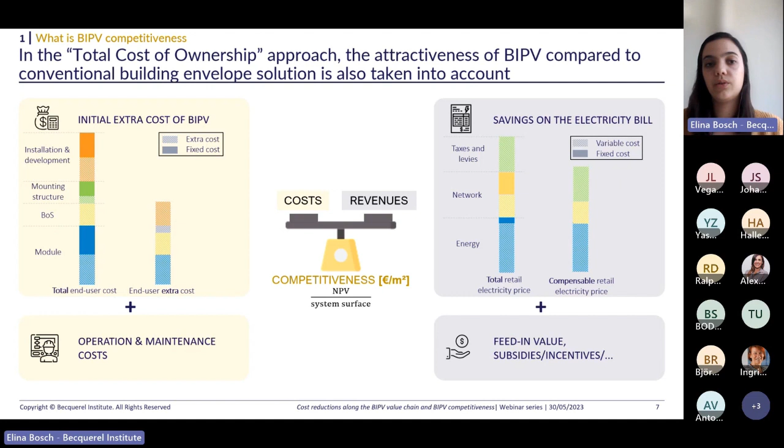In terms of revenues, we can typically have savings on the electricity bill, and for injected electricity, there could be feed-in tariffs, subsidies, or incentives applicable in certain countries. Some countries even have BIPV-specific subsidies or incentives. In the end, the question we try to answer is whether it's profitable to invest in a BIPV solution compared to a conventional construction solution.

To establish a benchmark of BIPV competitiveness in Europe, we took 4 different reference cases: 2 residential cases - a single-family house with BIPV on the roof, and a multi-family house with BIPV on the facade - and 2 non-residential reference cases: a semi-transparent curtain wall, and a roofing solution for an industrial building.

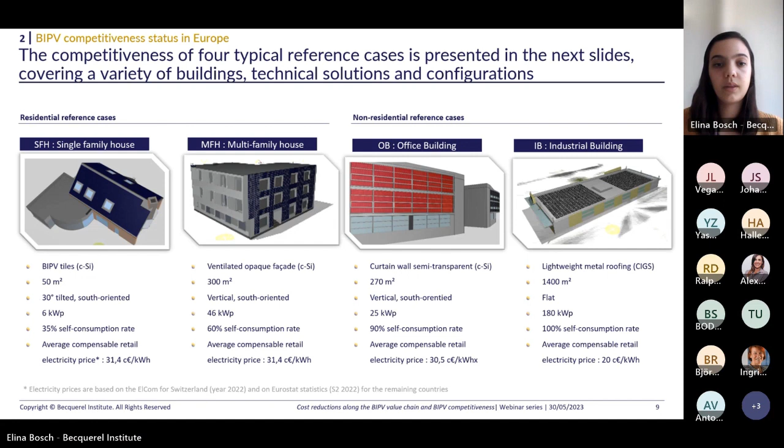For the residential BIPV systems, overall the results show that the solution can be profitable for residential roofs, and the competitiveness level can even be very attractive in some countries, thanks to good irradiation conditions or the presence of attractive support schemes.

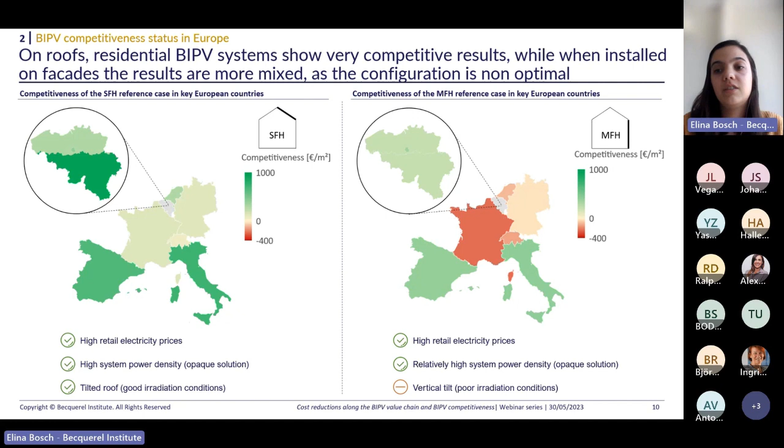For the multi-family house, because we are dealing with facade integration, we have slightly less favorable irradiation conditions, but competitiveness is still reached in most countries, or very close to being reached.

For the office building reference case, with a curtain wall semi-transparent solution, we have quite low system power density and a vertical tilt. Since we're not in the residential sector anymore, electricity prices are slightly lower, which reduces the potential savings on the electricity bill. So when irradiation conditions are quite good, the solution can be almost profitable under the considered system characteristics.

For an industrial building with a BIPV solution integrated into the flat roof, again in countries with good irradiation conditions, the solution can be profitable, even though in the industrial segment electricity prices are lower, which reduces the savings potential.

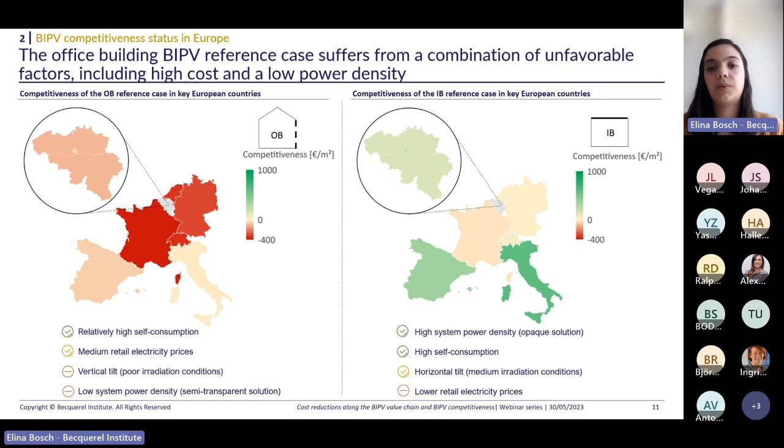There are several areas of improvement and innovation for BIPV products. In the BIPV Boost project, as it was presented well in the previous presentations, cost reduction has been addressed all along the value chain, from the studies part up to the use phase.

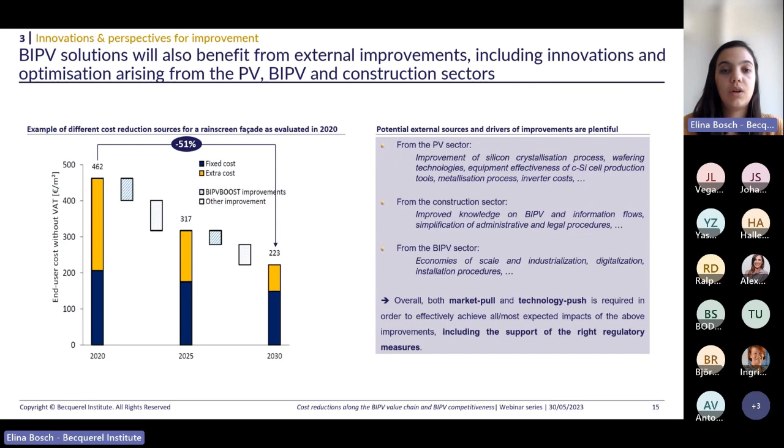And the cost reduction potential for BIPV products is not limited, of course, to improvements that are developed in projects such as BIPV Boost. BIPV systems can also benefit from improvements and cost reduction which arise from either the construction sector or the PV sector. So overall, it's both a question of market pull and technology push, which can allow to further reduce the cost of BIPV solutions.

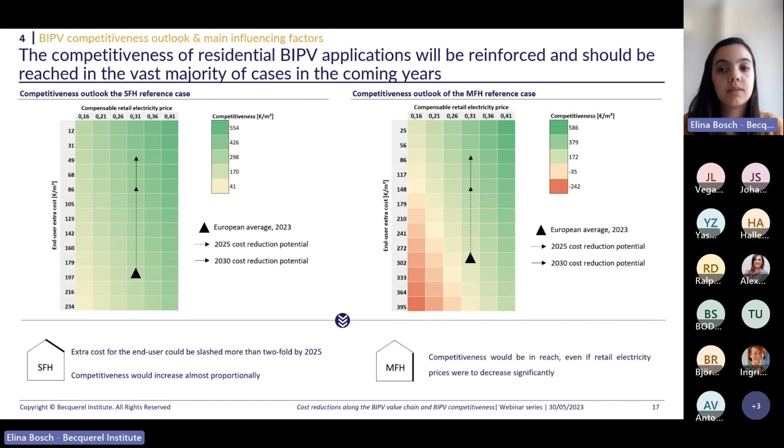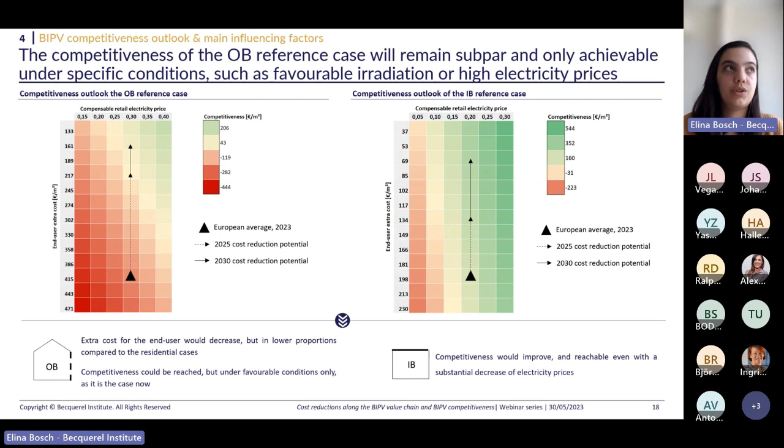Very quickly, the idea is that by combining all of the different cost reduction potentials from BIPV Boost, but also external cost reduction areas from construction and PV sector, there is a potential on one hand to further enhance the profitability of BIPV solutions which are already competitive. So that's what is presented on this slide. And if we look at solutions that are maybe under some configurations not yet profitable, with these cost reduction potentials, there is a possibility that the profitability or competitiveness threshold is reached in different boundary conditions.

In general, competitiveness of BIPV is not only a question of cost. There are other elements which highly impact the competitiveness that can be achieved. It can be location-specific factors such as the irradiation conditions or even the applicable support schemes. It can be project-specific enablers, so the electricity price that is paid by the customer that will be installing a BIPV solution, also the ability to self-consume, the tilt and orientation of the areas to which a BIPV solution can be integrated, and then also BIPV-specific factors such as, well, we mentioned the cost, but also system power density.